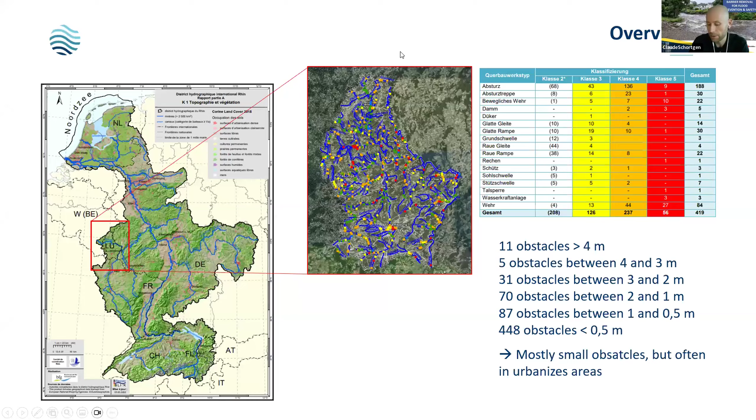So, small water bodies. As you can see in the table, and also in the image of Luxembourg, we have a lot of obstacles in rivers, which is a phenomenon that most of you are pretty sure you know from your countries. Most of them I would consider small, but small obstacles don't mean that they are easy to remove.

We have a few programs in Luxembourg that help us tackle the problem of barriers. First of all, the Water Framework Directive, which every European country needs to implement. We have 13 natural water bodies that we have declared as national nature reserves from source to mouth in our PNPN3 program. We have the Free Flowing River strategy launched at the World Fish Migration Day in 2024. And removing obstacles is a goal of the coalition agreement of the Luxembourgish government.

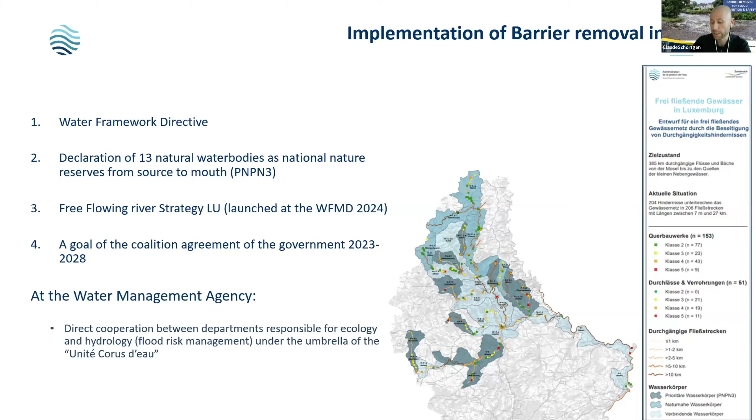At the Luxembourgish Water Management Agency, there's the Unité des Cours d'eau, the Department of Water Bodies, dealing with the problems of dams, ecological continuity, and flood risk management, which is very cool because all the ecologists, hydrologists, project managers, and construction experts work together under the umbrella of one department, which in my opinion helps a lot to tackle these problems and projects.

So I brought an example where we are planning to remove an obstacle and how we deal with flood risk. The obstacle is located on the Syre River in the east of Luxembourg. The Syre River flows into the Moselle River, which is the biggest transboundary river in Luxembourg, where we share the border with Germany. It's in fact a small obstacle, 0.6 meters high, and we did a project on this specific site in order to get rid of this obstacle. At the start of every project in Luxembourg, we do a variant analysis.

So we check different options, but one option is always the study of the removal of the dam. So if there are any specific things that don't work out, the focus of this project is, of course, the continuity and ecological enhancement of the whole river, but also flooding, technical feasibility and budget are topics when we start these projects.

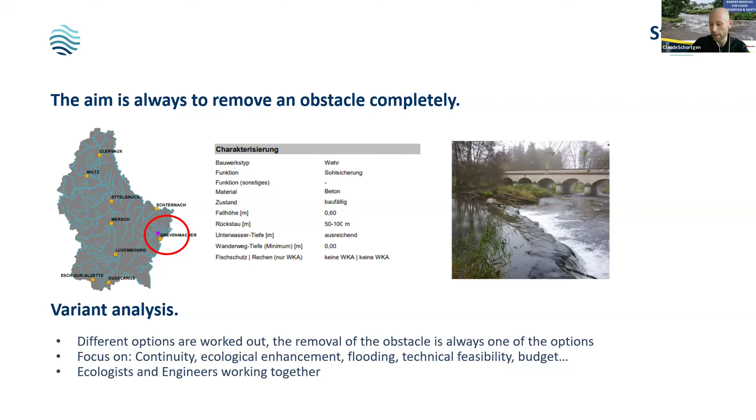Just like in our department, on a specific project, ecological experts and engineers, so hydraulic and hydrological engineers, are working together to find the best solution.

In Luxembourg, we decided that we will tackle the problems of a potential change in flood risk directly at the beginning of a project, because in our opinion it contributes to decision-making when you have different variants. It's also a very sensitive issue for potentially affected residents.

It's important to know what can be the influence of dam removal on flooding. If we have improvements on flood risks, that can easily increase the acceptance of a measure, so that is clearly a good point. And in the end of the day, we need to have these studies for the approval process.

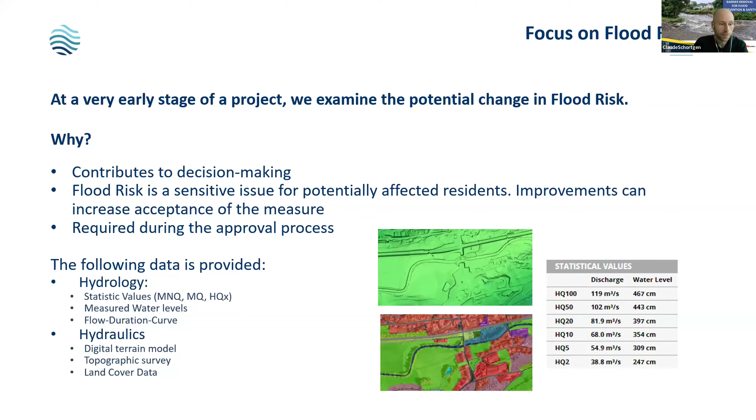To speed up the projects, we are delivering data to the people working on specific projects. So we can deliver statistical values on flood discharges, measured water levels, but we are also providing data which helps to build up a hydraulic model, for example digital terrain models, topographic surveys, or land cover data.

In this specific project, it has been decided to build up a 2D dimensional hydraulic model. This is not always the case—there are other methods that can be used to determine flood risk. Even expert judgment can be a method. It always depends on the specifics of the study area.

Well, in this case, due to the fact there were a lot of buildings potentially impacted by the project, it has been decided to make a 2D model, like I said. For this case, there have been additional topographic surveys of the dam and the bridge, which have been implemented in the hydraulic model. Afterwards, when the different variants were determined, these were also implemented into the hydraulic model.

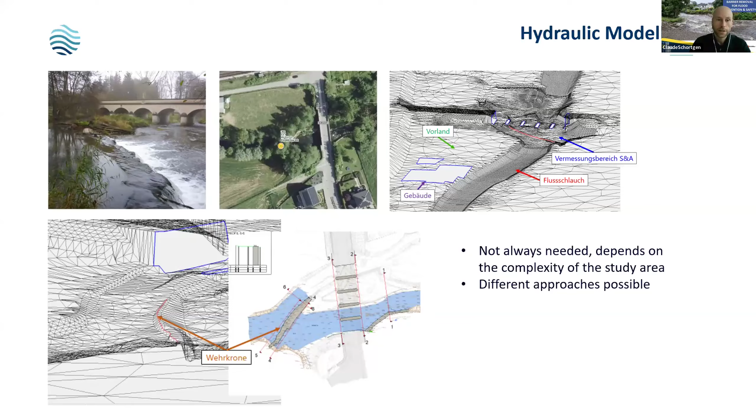We did the calculations and could review the results—the initial scenario and then the impact of the different variants. For example, we always look at the local impact, so what are the differences in water levels and in the flood zone?

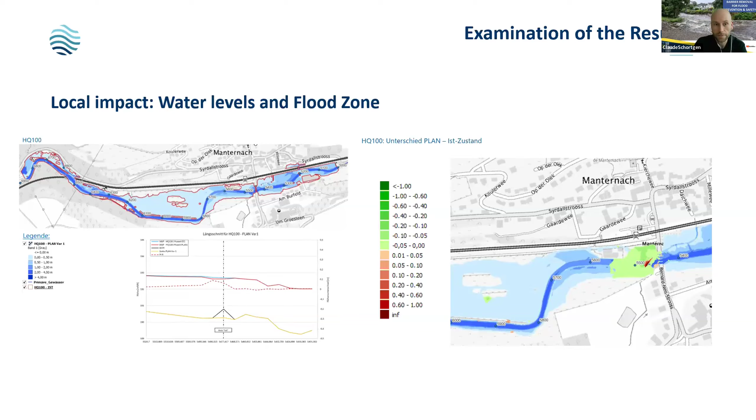As you can see here in red, the flood zone in the left image didn't change much due to the dam removal. We have a few changes in water level—mainly they are less high, which is a good thing here. You can see this in the image on the right: the green area means that we have lower water levels. These are two good things in this project.

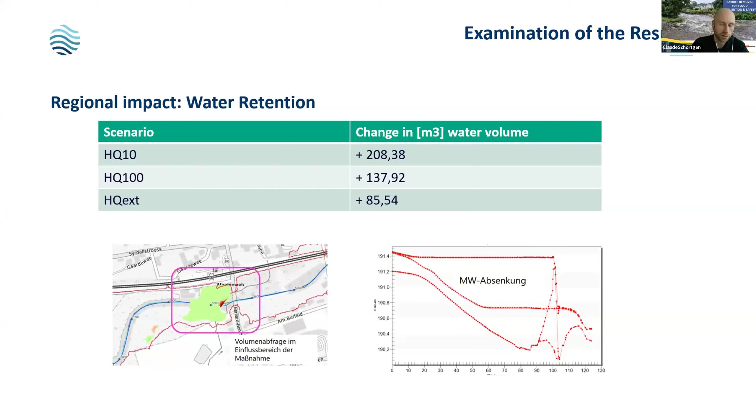Then we look at more regional impacts, looking at the water retention. We decided here to have a more simplistic analysis, so we are just looking at the water volume, which has been calculated for three flood scenarios. As you can see in the table, we have a slight gain in water volume—so there's more space for water. Even though it's not big, it's a positive effect, and that's good.

So in conclusion, hydrology and hydraulics are always studied in Luxembourg. In the case of the example I brought to you, we have no negative but slightly positive impacts. In other projects, there can be negative impacts, but that doesn't have to be a major problem—we can always look for possibilities to compensate them. If not, we have to go to other options. Optimally, of course, we want positive impacts on flood risk reduction from removal of the dam, but it always depends on the specific area where the project is located.

And in my opinion, it's always good to start flood risk studies at a very early stage of projects. So that was it for me. Thank you for your attention.

Thank you, Claude. Thank you. And I just have one very quick question, which you may or may not be able to answer: you said it was a sensitive issue for local residents.

How do you engage with local communities when proposing and communicating your plans? That depends on the project. There can be local meetings where we meet up with the people and explain the project to them. Sometimes we do much bigger information meetings where the whole city is invited and can look at the project, ask questions, and then we talk to them.

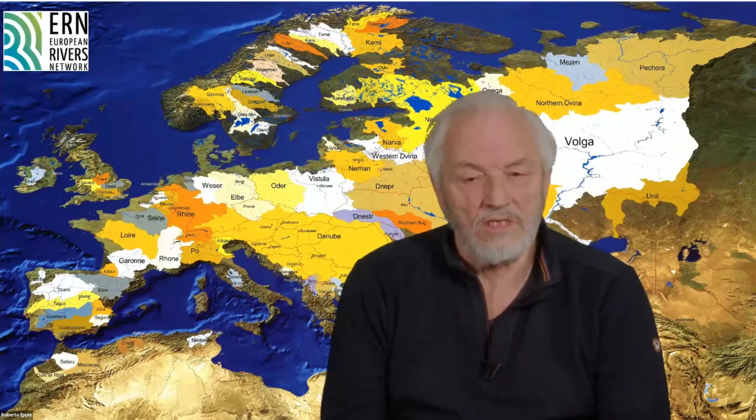First, I would like to introduce you to Dam Removal Europe and its work, and in a second part I discuss the history, with a focus on France, pioneer in dam removal.

Dam Removal Europe is a movement of river enthusiasts, volunteers, activists, river practitioners, biologists, environmental agencies, and other actors related to water management and freshwater ecosystem restoration. The whole network joins more than 5,000 individuals, but the motor of this movement is a coalition formed by 7 organizations united by one common goal: restoring free-flowing rivers. Currently, Dam Removal Europe is composed of WWF, the Rivers Trust, the Nature Conservancy, European Rivers Network, Rewilding Europe, and Wetlands International. DRE started in 2016 with the slogan, 'The freedom of rivers begins when barriers end.'

What do we do? We take a global approach: think globally and act local. We believe that by connecting the right people and working together, we can restore rivers faster and bring them to life again. Our action model is divided into several activities: identifying change makers in different countries, sharing solutions, generating awareness for the need to remove barriers, tracking down existing and removed river barriers, connecting practitioners and river enthusiasts around Europe, and helping organizations find funding for their dam removal projects.

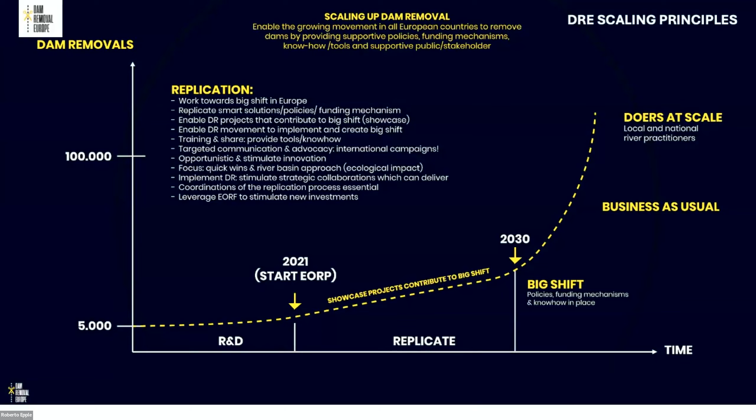The good news for the future is there is no way to achieve this goal without dam removal.

However, in order to understand how and why European public policy has developed in favor of river restoration through the creation of ecological continuity, we need to extend the time frame. It's always good to look back at the past to understand where we stand and what new paths to take—above all, which ones not to take.

This is not new, I agree, but it is still true. So, what is the background? Was there dam removal before DRE?

Yes, it started in the 80s and 90s, around the same time as developments in the USA. The following phases can be distinguished. From 1980 to 1995, most of Europe's rivers were in agony—straightened, dammed, polluted and overused. One of the most visible consequences was that salmon and other migratory indicator species either died out completely, for example in the Rhine and Elbe river basins, or were severely threatened.

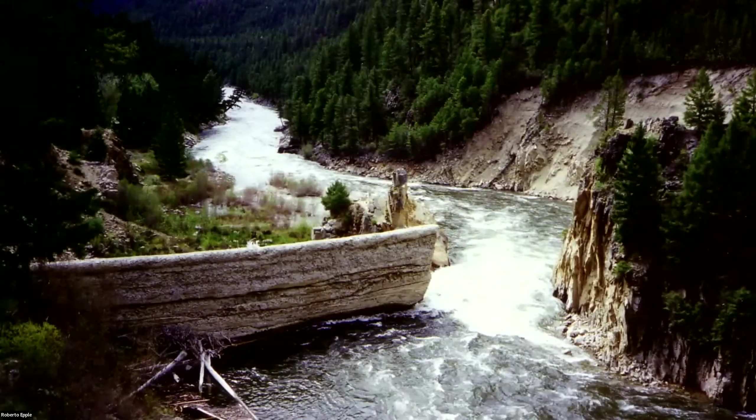I remember meeting with North American NGOs in Idaho. During a private excursion, I happened to come across a strange dam on a salmon river—only half of it was still standing. Local people explained that this disused dam had been spontaneously dismantled, without any authorization, by the local Native American population.

Back in Europe, we included dam removal in our Loire Vivante campaign. But dam removal was still absolutely unthinkable in Europe. That is why we first had to unblock thousands of people's minds before dam removal became an option. After a 10-year campaign, the vision became a reality.

From 1996 to 2000, the first ever removal of 3 major dams took place in France, parallel to removals in the US. Main reasons: continuity for migrating fish and outdated dams in poor technical condition.

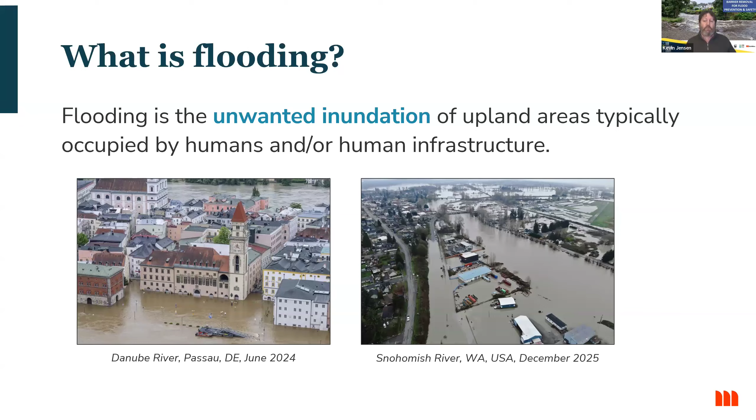Instead, here we understand flooding to mean that type of inundation that impacts the built environment or impacts public safety or both. And it's this type of flooding that we seek to reduce through barrier removal. But what do we mean by barrier removal? What's a barrier? A barrier is a longitudinal or lateral feature within a river corridor that alters or stops the flow of water. Longitudinal barriers, or sometimes transverse barriers, are barriers that obstruct the flow of water longitudinally or in the downstream direction. Examples include dams, weirs, and waterfalls.

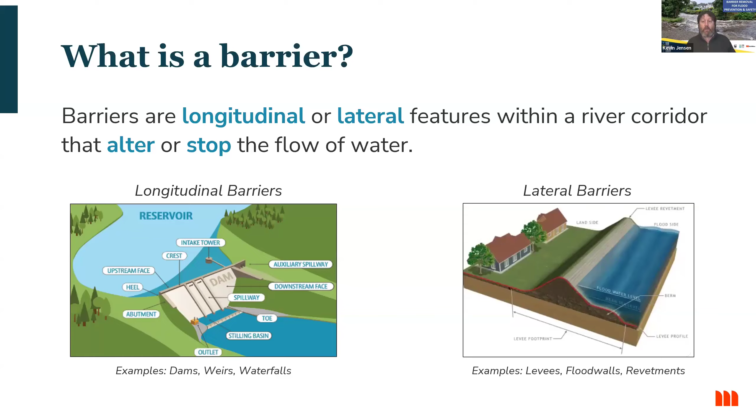These barriers don't usually prevent water from passing downstream, but they do alter the flow of water as it continues on its path. Lateral barriers are those that obstruct the flow of water laterally or over the banks of a river and into the floodplain. Examples of these barriers include levees, flood walls, and revetments. These are structures that usually keep water out entirely.

Okay, so based on these definitions, you might be wondering if certain barriers actually prevent flooding. And I think the answer to that question is yes, some barriers do prevent flooding. For instance, there are dams that have been constructed primarily for flood control. So here's an example on the left from the Los Angeles River in Southern California, where Sepulveda Dam was constructed to detain water and attenuate flood peaks upstream of a highly urbanized environment. And on the right, we have another example from my region in the Pacific Northwest, where Mud Mountain Dam is operated as a flood control facility.

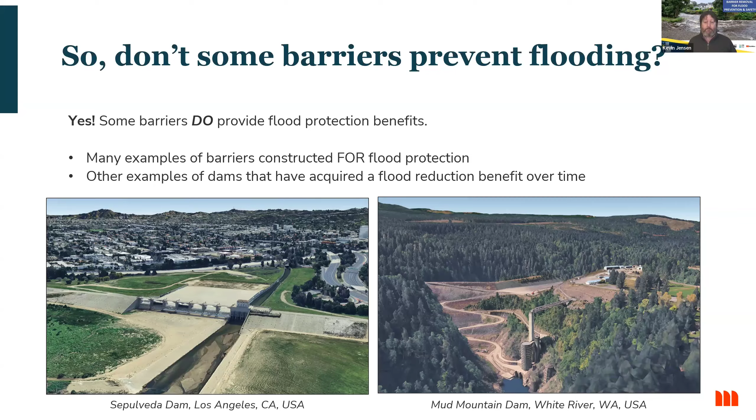These are examples of longitudinal barriers that provide flood protection, but there are also many, many lateral barriers that continue to provide flood protection in developed areas through the use of levees and flood walls. I mention these examples because I want to be clear that some barriers provide flood protection, and their removal may exacerbate flooding risk in the absence of additional infrastructure modifications. So as we continue this talk, please remember that barrier removal should be preceded by a thorough consideration of the existing benefits of each barrier, should there be any.

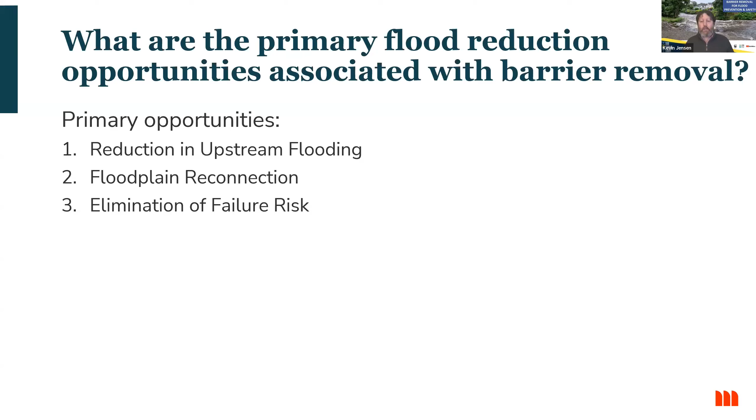Okay, enough preamble. So what are the primary flood reduction opportunities associated with barrier removal? Well, there are really three primary flood reduction opportunities associated with barrier removal, namely reduction in upstream flooding, floodplain reconnection, and elimination of failure risk. I'd like to talk briefly about the mechanisms of each of these, along with some examples, important considerations, and potential benefits. And we'll start with reduction in upstream flooding.

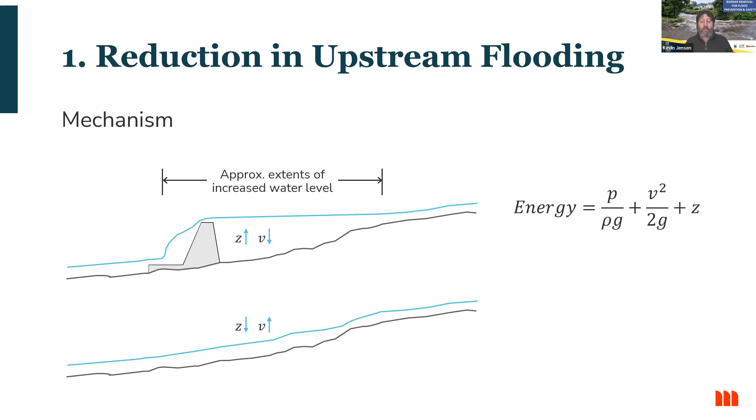So when longitudinal barriers like dams are installed, they impound water behind them, kind of like this figure. For the fluid mechanics people out there, this results in a decrease in the velocity head and a corresponding increase in the elevation head behind the barrier. That leads to an area upstream of the barrier that experiences higher water levels, all else being equal. So when we take a barrier out, the opposite occurs, right? Water starts flowing freely again, and the elevation head drops down, and the average velocity goes up. And it's this reduction in elevation head upstream of the removed barrier that can lead to reductions in upstream flooding.

This is an example from León, Spain, where the San Marcos weir once stood. In the photo at left, we can see the effect of the inundated weir, which creates a hydraulic jump in the flow field. By the way, that hydraulic jump creates a velocity barrier for most aquatic organisms, but that's a topic for a different discussion.

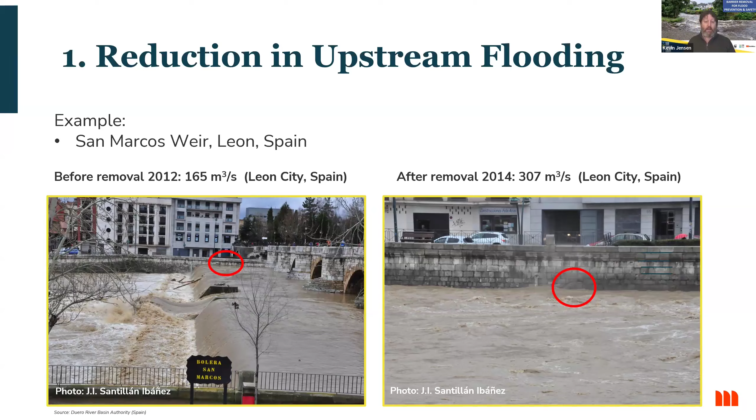In the photo on the right, after the weir was removed, we not only see the disappearance of the hydraulic jump, we also see a significant lowering of the water level. And that's at a flow rate that's roughly twice the flow rate shown in the photo at left.

Of course, there are important effects of barrier removal that must be considered in the areas upstream. That includes bank stability. So when water levels are lowered, the bank loses the hydrostatic support of the water column. And in addition, pore water pressures remain high. That can lead to localized bank collapse that can impact property owners.

Another consideration is channel degradation. In cases where weirs have been in place for a long time, the channel upstream has likely experienced some level of sediment deposition and channel aggradation. And when a barrier is removed, this area is often oversteepened, and to equilibrate will lead to the mobilization of that impounded material and the associated degradation or incision of the channel. It's not necessarily a bad thing per se, but it can have downstream water quality impacts.

And lastly, vegetation impacts upstream of barriers need to be considered prior to removal. In many cases where the water level's lowered after barrier removal, the associated groundwater level upstream gradually lowers as well. This can make it more difficult for riparian vegetation to access water.

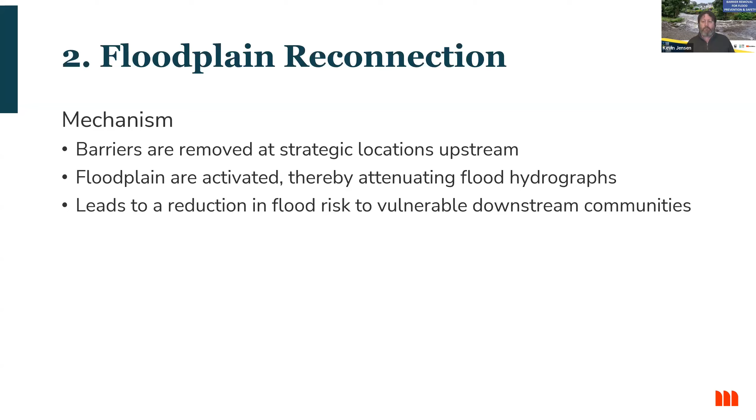In terms of storage, as the floodplain's inundated, the water spreads out and slows down. This has the effect of lowering the peak of the hydrograph, effectively lowering the peak of the storm. And in terms of loss, floodplain reconnection may lead to stormwater infiltration into the ground, which further reduces the peak of the hydrograph.

A great example of this type of flood protection effort is taken from Johnson Creek, which is a tributary to the Willamette River in Western Oregon in the US. Here, formerly developed rural land was acquired, and the banks of the river were reconfigured to reconnect high flows to a restored floodplain of about 1/4 of a square kilometer in area. That's the little green area shown in the figure on the bottom left that's called out as the East Lents Reach. You'll notice that further downstream, so to the left in the figure, is the town of Milwaukie, Oregon, which has about 20,000 people living there.

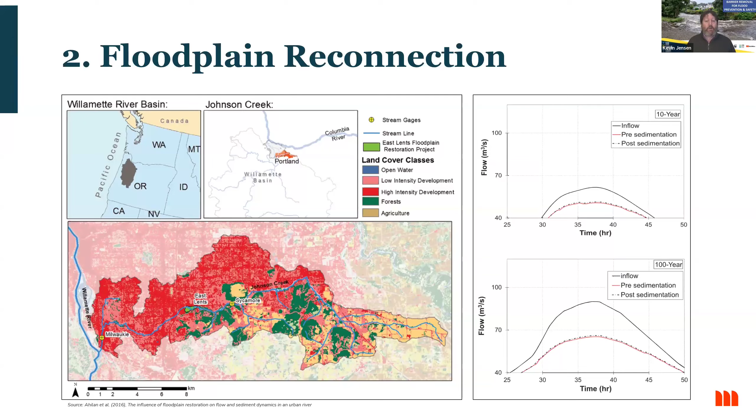Of course, for this type of flood reduction to really work, specific conditions need to be met so that we're not doing more harm than good. Specifically, the barrier should probably not be an active flood protection barrier, such as a levee located within an urban corridor. There are plenty of instances of existing levees that are defunct and that no longer protect areas from inundation. These may be good candidates for removal and may lead to downstream flood protection.

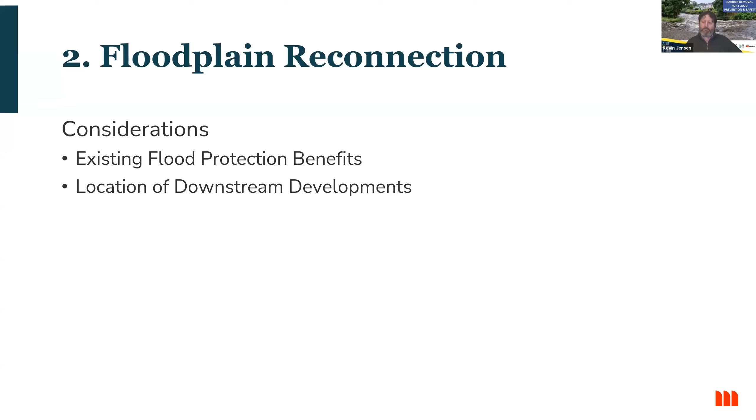Another consideration is the proximity of the inundated floodplain to the downstream communities or infrastructure. So if the location where we need protection is too far downstream, the impact of the floodplain reconnection may approach insignificance as a larger and larger watershed contributes water to the river.

Okay, the third and final type of flood protection through barrier removal is due to the elimination of failure risk. So in all of the cases I discussed before, flooding is a probabilistic phenomenon. Therefore, flood protection can be understood really as a reduction in flood risk. Here, however, we have the complete elimination of a risk, specifically the flooding risk associated with an uncontrolled release of water impounded behind a longitudinal or lateral barrier. Without the barrier, there's nothing to fail.

These figures provide a little more context about this risk. So in the United States, about 65% of historical failure events have occurred at dams that are 65 years old or younger. Meanwhile, about 76% of all dams larger than 50 feet tall, so about 15 meters, are 65 years old or younger. The point here being that the likelihood of failure events into the future seems credible, as does the flooding that may accompany those failures.

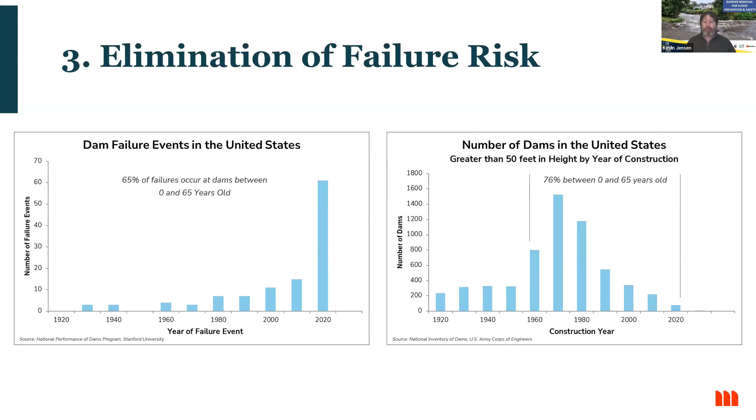Mechanisms of failure events include piping failures in earthen embankments through seepage pathways, overtopping failures during floods, or load rejections at hydropower plants, or seiches following landslides, and structural failures during extreme loading conditions such as earthquakes.

Okay, last slide. I know it's not the sexiest, but it's important. One of the main considerations when it comes to the elimination of failure risk through barrier removal is related to the existing beneficial uses of the barrier. In the case of lateral barriers, when they fail, they can have devastating consequences. However, they may also protect communities and infrastructure during much more frequent storms. So managers need to weigh the benefits and relative risks associated with keeping or removing those particular barriers.

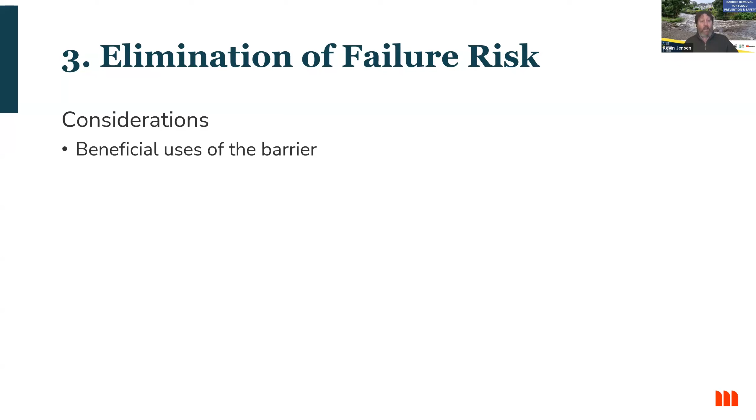And in the case of dams that could cause significant flooding were they to fail, they too may very well provide societal benefits, including flood protection, water storage, hydropower, and more, such that once again, a holistic approach and thorough weighing of the pros and cons of removal should be conducted.

And that's what I've got. Back to you, Ella. Kevin, that was great. Thank you so much. Really interesting and helpful. A few questions here have just come in.

How do you deal with the eroded downstream stretch of river after barrier removal? So that's a complex question to answer. In many cases, with barrier removal, the material impounded behind the barrier will make its way downstream and actually aggrade the channel or build it back up. So there could be localized incision, but on a broad scale, actually dam removal will reestablish that natural sediment transport regime and could help build up an incised channel.

Okay, and finally, this is a question that came in: when we talk about open rivers and dam removal, the person asks, I would like to ask if my understanding that we are talking about removal in ecologically important rivers and dams is correct? What are your thoughts with regard to, say, hydroelectric projects?

Right. So again, the focus of this discussion was primarily on flood protection. But let it be known there are absolutely other advantages to the removal of dams and levees, which include ecosystem restoration, aquatic habitat health, reconnection, and so forth. It gets kind of complicated once again when we talk about societal benefits related to hydropower. And again, managers need to weigh the pros and cons of the benefits through ecosystem services and flood protection, for example, with power production. Not the most straightforward answer, but that's what we got.

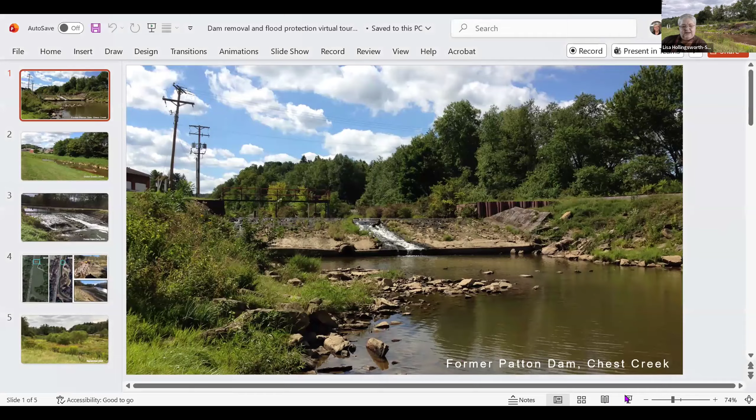And it had been a public water supply, and that use was retired in 2015. So the dam no longer had a purpose. Let's see, need to go to this. Thank you. Come on. There we go.

All right. So moving along, this dam was located actually at the head of a levee. So that was kind of interesting, the situation here. And you'll see this levee actually has some

random boulder placement, and it's actually habitat for trout, which is a salmonid species here in the United States. And that was done purposefully just to prove a point that you could add habitat into an area that was leveed and it didn't cause any kind of a problem or a rise that would cause a problem with flooding.

We actually did not touch the leveed section at all. We just looked at the dam. And behind the dam, of course, we have elevated water, raised the water level about 4 meters. And behind it, we had a wetland that had been drowned and a floodplain that had been disconnected.

So as you can see, the dam was deteriorating. This is what it looked like in 2019. The community was just not convinced that they needed to get rid of this dam. It had been their public water supply since the 1950s. People had an idea that maybe they might put it back in service.

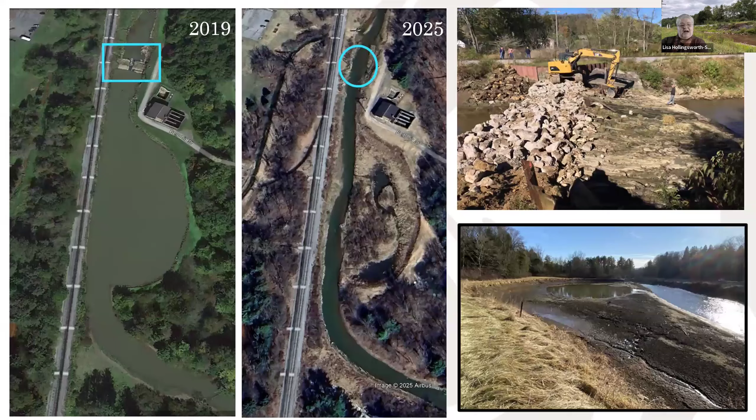And after that flood, the community said, okay, we believe you. Let's get rid of this dam. We realize that the flooding is related to the dam itself.

And so here's a comparison, both overhead views, aerial views, and then a picture on the right of dam removal construction, and also the wetland area that was behind the dam that had been inundated. So you can see the changes here. We exposed this wetland. We have lateral connectivity now at this site, and the site was chosen specifically for that opportunity.

So one of the questions that Herman asked me when we talked about this project was, how could we make sure - how could we prove that this actually worked. And okay, so I'm done with my slides. Let me back up here.

And the answer to that is that, first of all, we've had 7 storms since that flood in 2018 that have equaled or exceeded the flood flow. And there have been - the stream has not gotten out of its channels. It has not flooded the area that it flooded before.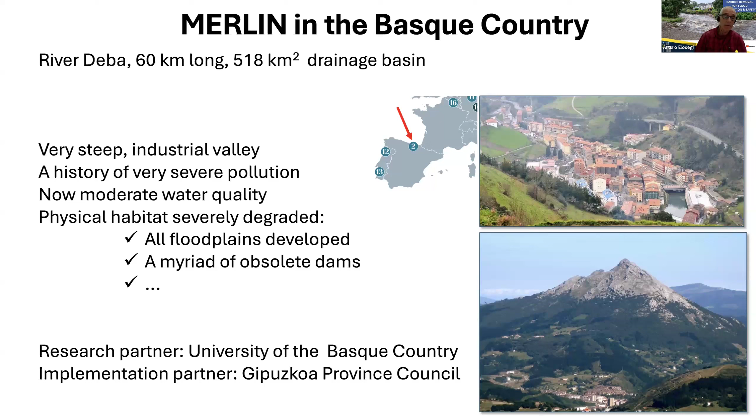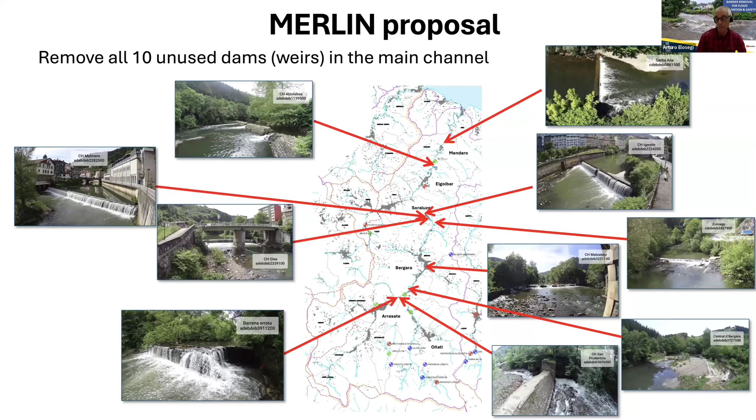So there we are working as a research partner, the University of the Basque Country, and as what we call an implementation partner, the Gipuzkoa Province Council. Our plan was to remove all unused dams in the main channel of the river Deba, that means 10 dams. They are not real dams, they are weirs, they have no capacity to regulate the flow, just elevate the water level. There are some still active ones used for hydropower and other uses, but these 10 were long unused, so we wanted to remove all of them.

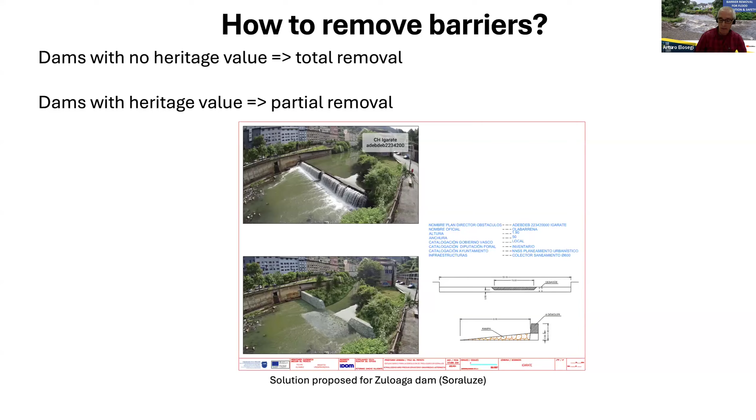And how do you plan to do that? Well, that depends. Some of the dams have no heritage value at all, so we planned total removal, whereas in dams with heritage value, our plan was partial removal, like in this proposal here. You can see in the top picture the current dam, and there we wanted to open a trench in the middle tier of the dam.

Dams and flooding - Kevin has explained it much better than I could, but contrary to common belief, dams, especially urban ones and small dams, increase flooding risk. Only large dams, which have large storage capacity, reduce it. In the Basque Country, we have many flood risk maps, and many exercises modeling what would happen if we remove dams, if we change bridges, and so on. In general, we see that especially in urban sections, we can improve the situation a lot for low and moderate floods. For the big flood, the one that happens once every century, this is not the solution.

We are here in the province of Gipuzkoa, which is one of the provinces in Spain where the economic damage of these floods is larger. So what did we do? First, we met all councils, most city mayors. We contacted all stakeholders in the valley: hydropower, the water sectors, agriculture, industry, even people who are working to protect the dams.

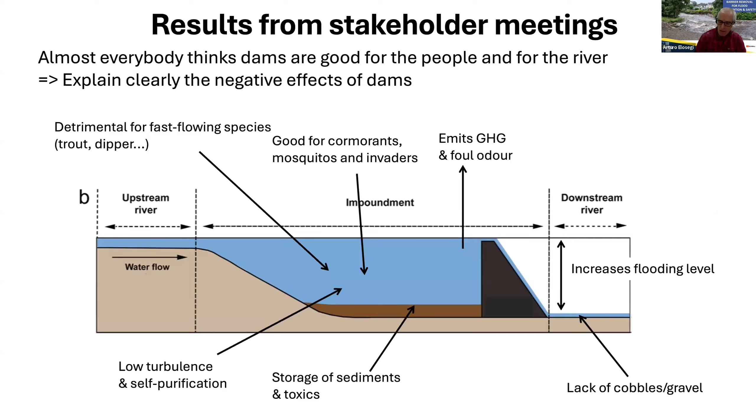In these stakeholder meetings, we realized that almost everyone thought dams are good for the people and for the river. So we had to clearly explain the negative effects of dams, as Kevin did, using this figure showing the extent of impacts of dams: they increase flooding level, more invaders, more mosquitoes, toxic sediments, and so on. Eventually we managed to convince most people that the dams near their houses were detrimental for them.

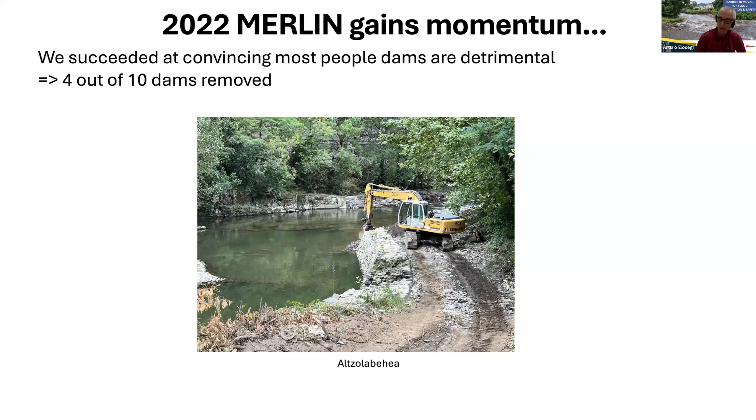In 2022, the first year of Merlin, we succeeded at removing 4 out of the 10 dams. So everything seemed okay, we were going at a very good pace, but then we hit a double barrier: first a legal barrier linked to culture, and second a psychological barrier.

The legal barrier: many of these dams were declared of heritage value by city councils, associated with ancient mills or factories. The idea was that even if they are of heritage value, we could still open them or build a trench. But the Department of Culture of the Basque government declared these dams of top value and forbade any action on them, intending to protect them like the best cathedral in Spain or the Grotto of Altamira.

When we complained that these dams create a flood hazard, they said we should seek alternative measures such as dredging, cleaning vegetation, building fish ladders, and that we must protect not only the dam but also the riverscape. We met with the Basque government and realized they were upset with us environmentalists who they felt despise heritage — they felt outraged by this dam removal movement in Europe.

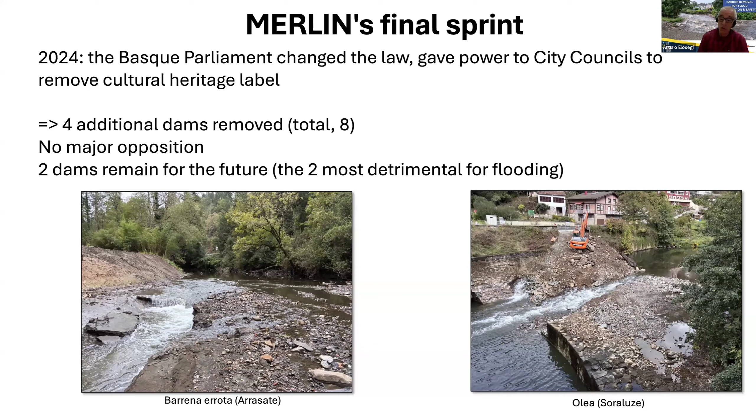Surprisingly to me, there was no major opposition. I expected demonstrations and nothing happened. 2 dams remain for the future. The project is ending next month, but I hope they will be removed soon.

To finish, the University of the Basque Country started last year to assess the social impact of its research projects, and they selected Merlin as a pilot project. So we had a meeting in which they asked me, what is your balance? I thought it was important for society and so on.

Then Arantxa Zurunzaga, the engineer at the Province Council, thought Merlin changed their approach to river restoration, that they learned the importance of including the local population in decision making. So she was more positive than me.

Then the mayor of Soraluze said Merlin was extremely important, that it forced the town to rethink its relationship with the river. The process is still going on, but the outcome will be a more sustainable town. So the most positive among all of us was the mayor, who had to live with people protesting every day at the door of his office.

So did we learn anything? First, we learned that there are still many wrong perceptions of the benefits and risks of dams, so outreach is necessary. We also learned that some people will not accept any evidence - even very clever and well-educated people. You cannot convince flat Earth believers.

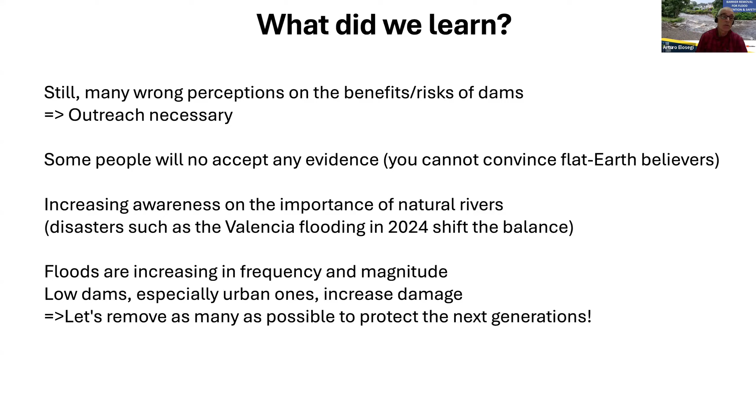We know floods are increasing in frequency and magnitude, and that these low dams or weirs, especially urban ones, increase the damage. So let's remove as many as possible to protect the next generation. Thank you.

It depends on the person. For some, the ecological benefits of restoring fish habitat were most important. For others, it was the reduction of flooding risk. For some, the reduction in mosquito populations. So you need a battery of arguments, and you have to learn how to use them at the right moment with the right person.

We have a question here. What do you do with stored sludge and toxins in the reservoirs? How do you make sure it doesn't pollute the downstream river after dam removal? Is the sludge typically pumped out before dam removal projects?

This river was in the past extremely polluted. Now, whenever they analyze the sediments, they are not so bad, and our rivers are very flashy, so when you remove the dam, the sediments are carried away to the sea or farther. So far we have not seen any impact of these sediments. The province council has already removed about 130 dams, out of over 1,000 they had in the province, and we have not seen any impact of these sediments.

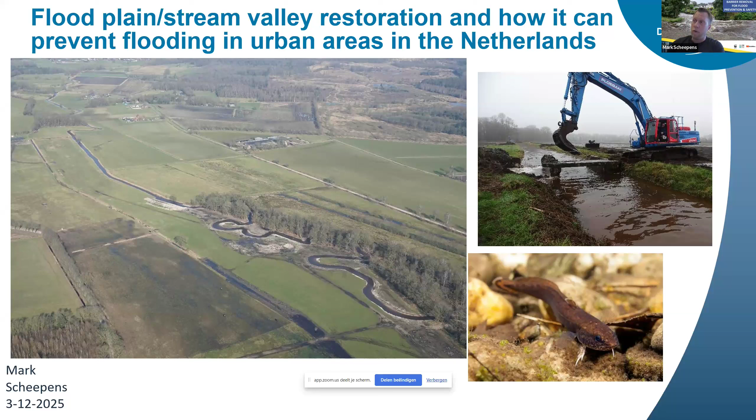The Water Authority is responsible for managing and improving the water quality and quantity in the streams and rivers located in the central part of the province of North Brabant in the south of the Netherlands. We are responsible for wastewater treatment and for the management and maintenance of the streams.

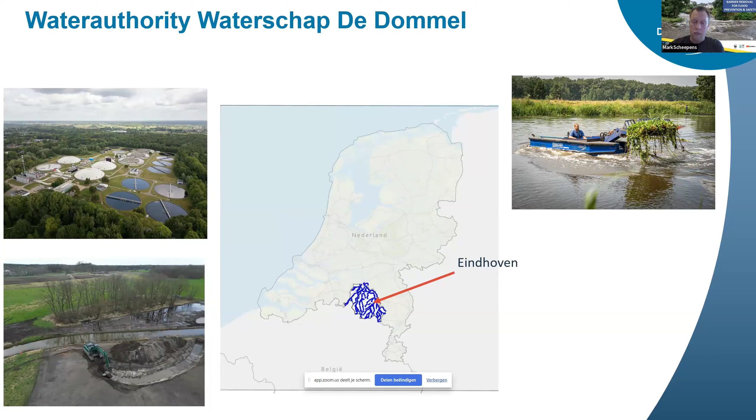We are also responsible to take measures to improve the chemical and ecological status of our streams. This stems from the responsibility we have to achieve a good ecological status of our streams in accordance with the Water Framework Directive. Central located in our catchment area is the city of Eindhoven, and this area is especially known for its high-tech industries, and the company ASML is the largest employer in our catchment.

Now, something about the history. The streams were formed after the last ice age approximately 20,000 years ago. The melting ice eroded the valleys and streams, creating streams on a primarily sandy subsoil.

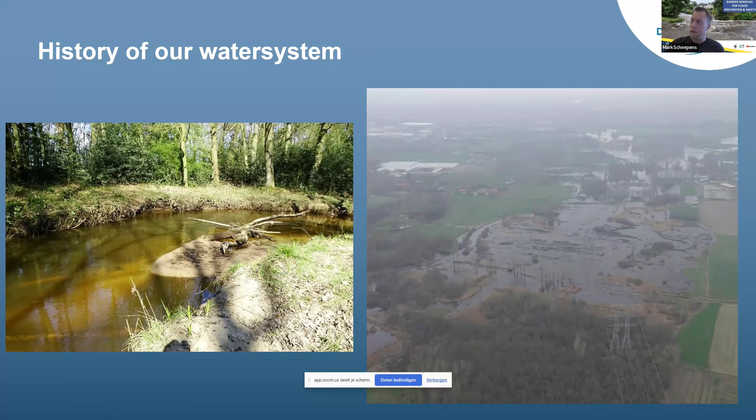The streams are naturally fed by rain and groundwater. Very deep and old groundwater seeps upwards in the catchment area, primarily in the stream valleys. In the southern part of the river basin, the level landscape is approximately 35 meters above sea level, and in the north, where the Dommel flows into the Meuse, the landscape level is approximately 3 meters above sea level. We call our streams lowland streams on sandy soil.

Now, the Dommel Authority was founded in 1863. Our only goal back then was to drain the water as quickly as possible for agricultural purposes and improve the situation for urbanization. This means that streams were canalized and many weirs were built to artificially manage the water level.

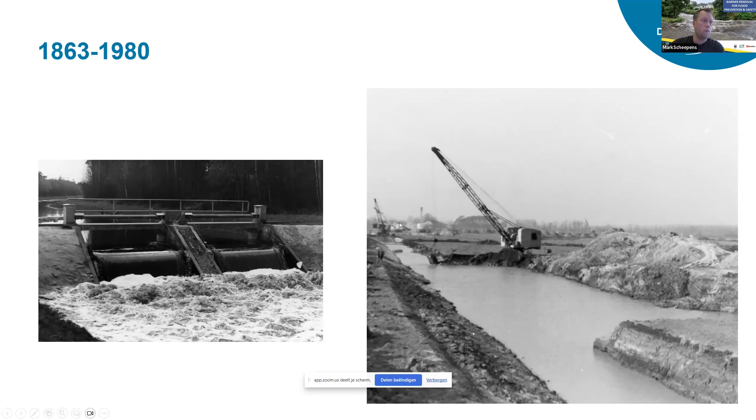We have installed approximately 170 weirs that restrict fish migration and the achievement of a good ecological status. Most weirs have a drop between 0.5 and 1.5 meters. The weirs are not big dams, but big enough to prevent fish from migrating. More importantly, they restrict free flow, preventing processes like sedimentation and erosion. As a result, a lot of silt remains in the water system.

These measures had a major negative impact on the ecology of the streams and stream valleys. Also importantly, groundwater levels have dropped dramatically, and the wet river valleys with their natural rich vegetation and biodiversity have largely disappeared.

We are not going to achieve the goal to be ready before 2027, but we have already come a long way. From 1989 till now we have solved 104 bottlenecks, and we have about 60 weirs where we have yet to solve the fish migration bottleneck. From the 104 fish migration solutions, there are 56 free flow solutions and 48 technical solutions.

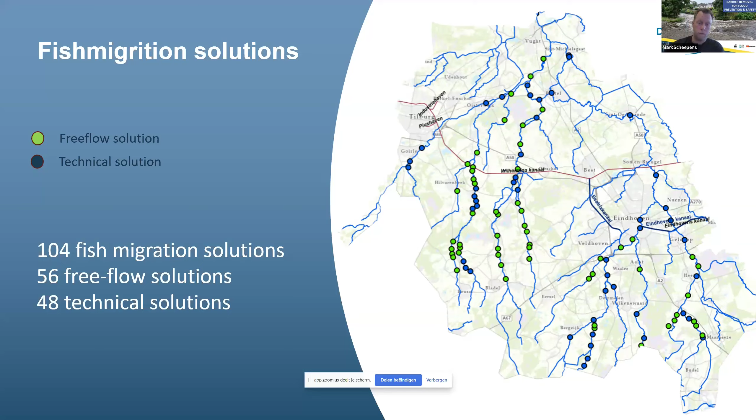When we are working on a solution, the first thing we look at is if we can remove the weir. If that's not possible, then we look for a technical solution. If we would only install technical solutions, then we would not improve the ecological status of our water system.

The challenge with removing weirs is that we must combine this with stream and valley restoration. We achieve this by removing weirs from streams in conjunction with stream and valley restoration. When the weirs were built, the streams were also canalized, so we cannot remove the weirs if we do not also let them meander again. On the right of the screen is a photo of an example of one of our latest remeandering projects. In this project, we have removed 3 weirs.

Now, why don't we always go for a technical solution or go for a free flow solution? Especially in urban areas where there's no room to remeander the streams, we therefore cannot remove a weir.

In this picture on the left, a weir in the Dommel in an urban area. We have made a vertical slot fish passage and a canoe gutter on the left side of the picture. In urban areas, there's no room to remeander.

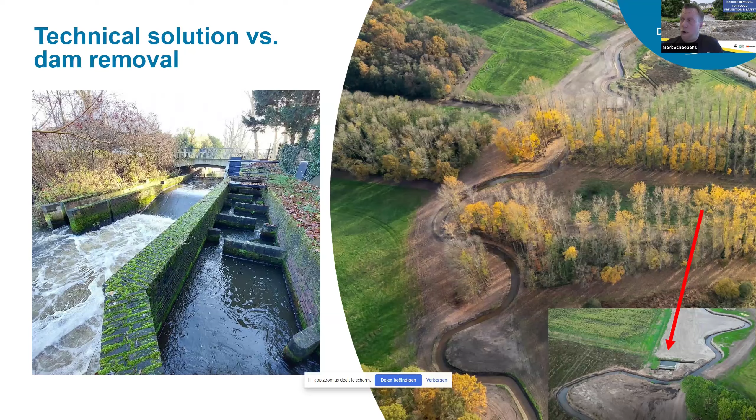In some cases, the weir is not a weir but an old watermill, and those in the area of Eindhoven are all protected monuments, and 3 of them are painted by Vincent van Gogh, which makes them a part of our culture.

The Water Authority was initially established solely to ensure drought conditions. However, with climate change, we are now seeing prolonged droughts combined with increased rainfalls in short periods of time, forcing us to change. Add to this the enormous population growth, and the drinking water supply in our catchment is entirely dependent on groundwater. Farmers also extract significant groundwater for crop irrigation.

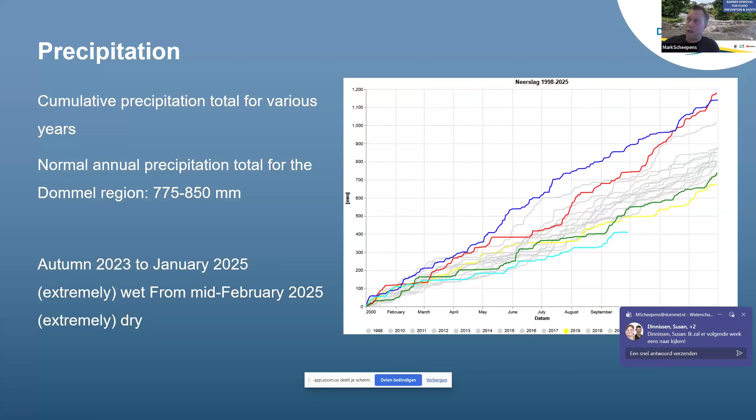This causes groundwater levels to decrease, which has a direct impact on the water flow of streams and valleys. The water system is out of balance despite the fact that the Netherlands has a precipitation surplus. The summer of 2018 saw one of the driest years. Due to the drought, there was a lot of drying out and therefore a lot of fish mortality in our streams. The winters of 23 and 24 were years with extremely high rainfall. The rainfall caused a lot of flooding, mainly in rural areas.

Especially after the dry summers of 2018 and 2019, we realized that things need to change and that water should be a guiding principle. As a catalyst for this dry period, we, Waterschap de Dommel, have developed a new vision, the water transition, what water wants. It divides the area into three parts: the high peaks, the flanks, and the stream valleys. In the stream valleys, we have set goals: sufficient space to absorb rainfall peaks, a stream valley that does not have a drying effect on the environment. That means water gets more space, streams keep flowing, and the valley is becoming wetter.

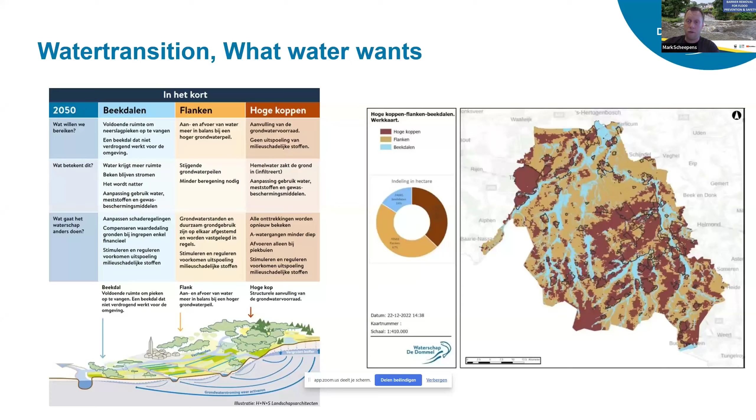Now, what will the Water Authority do differently to achieve these goals? We have subsidies for blue services where farmers can get compensation for loss of income due to water targets such as water storage, the discontinuation of crop protection products, and measures to increase ground and surface water levels. When we have taken the measure stream valley restoration, we then sell the land with the restriction that it must be managed as nature and that no more fertilizers or pesticides may be applied to the land.

For the Run stream, I have worked out how we have applied the water transition in practice here. The Run is a lowland stream upstream of the city of Eindhoven. The stream has also been canalized in the past, and numerous weirs have been installed. As a result, the ecological quality is poor according to the Water Framework Directive. To improve the water quality, we began removing 2 weirs in 2021. Instead, we re-meandered the stream and created a floodplain.

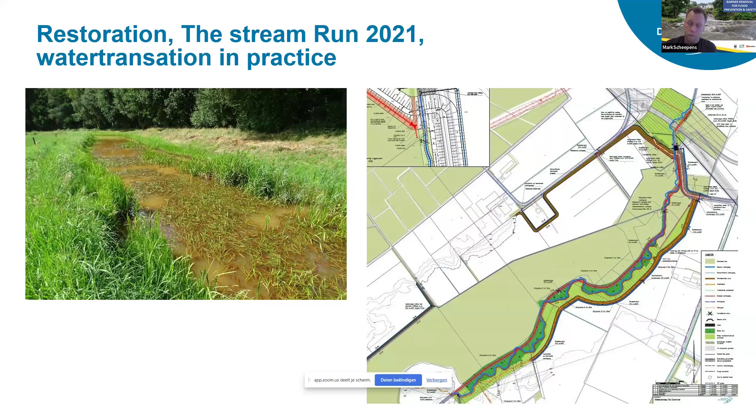The stream's immediate riparian areas have been removed from agricultural production. Measures have been taken to wet the stream valley by filling in ditches and making the meandering stream very shallow, so it no longer captures as much groundwater. With these measures, we have an increase in flooding, which we have taken very deliberately. We bought the agricultural land along the stream to develop it for our water purposes. The picture on the left is the canalized stream.

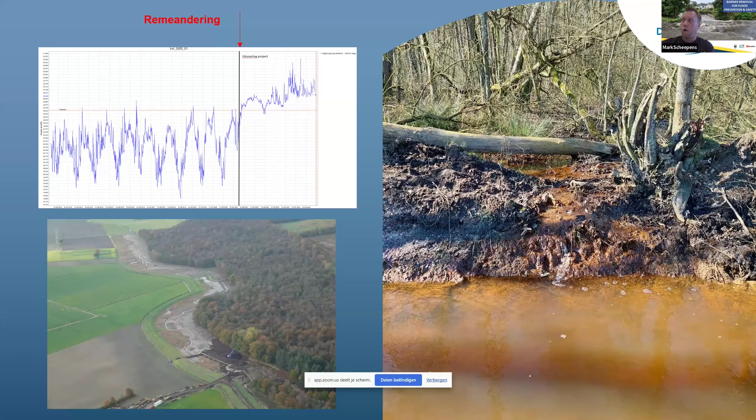Due to the measures taken, groundwater levels have risen significantly, and the water is now above ground level. In the graphic, you see the groundwater levels before and after the project. The photo under the graphic is taken during the execution of the work. In the photo on the right, you see that groundwater no longer seeps directly into the stream, but flows across the ground to the stream.

Now, in the background of the photo on the right, you see white buildings. Those are ASML buildings where they manufacture their famous chip machines. And behind them lies the city of Eindhoven. If there's extreme rainfall, built-up areas in Eindhoven can flood. These are situations that occur once every 100 years from our calculations. If that threatens, we can store an additional 460,000 cubic meters of water in this area to prevent flooding in Eindhoven's urban and industrial areas.

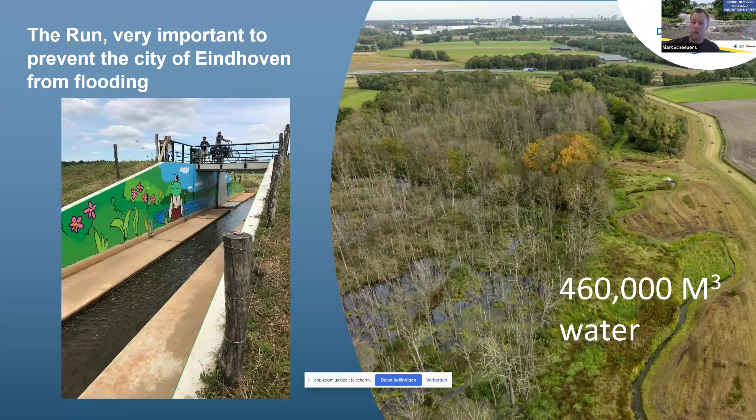We built this weir and dike on the left. The weir is always inactive, so it doesn't restrict free flow or fish migration. If the city of Eindhoven is in danger of flooding, we will raise the weir and the Run catchment area will automatically fill with water. Here are some results of the project.

Now, what challenges do we face? We have subsidies for blue services where farmers can get compensation for loss of income due to water targets, such as water storage and the discontinuation of crop protection products. It is still entirely voluntary to participate in this, and the compensation does not always outweigh the profits from current crops such as beet, corn, and potatoes.

Those vegetations do not go well with wet stream valleys, so there is some resistance among farmers to raising water and groundwater levels. In the Netherlands, we've always tried to control water. Now we need to make water the guiding principle, something that's not yet in our DNA. Current generations often prefer a water system that is manageable and controllable.

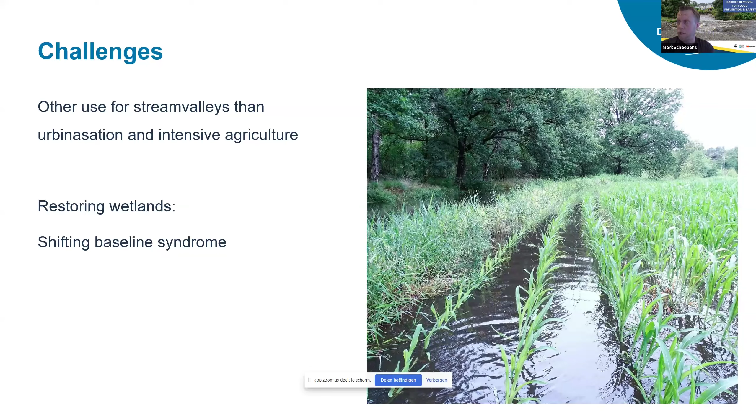This is also where the shifting baseline syndrome comes in. Entire generations, including myself, are no longer accustomed to wet stream valleys. Because we Dutch people have such a long history of fighting against water, we often see the danger of water more than the benefits it brings us. It would be wonderful if the new generations were given a different baseline, where they are once again accustomed to stream valleys being wet, highly biodiverse, and also protecting urban areas against flooding.

And the good news is that we have some farmers who see opportunities to farm biologically and use the wet stream valleys to their advantage. A biological farm has bought 30 hectares of wet stream valleys to use the vegetation in their deep litter cowshed. This was also a project where we removed two weirs and created a wet stream valley and flowing stream.

After the project was done, we sold the land to this farmer for a reduced price because the land has restrictions in the use of fertilizers and crop protection, and because wet stream valleys do not have such a high yield and mowing entails higher costs.

So the answer to the question, can dam removal prevent flooding? Yes, it can in places where we absolutely don't want floods. In a big part of our stream valleys, we should raise the water level, and that means that it will increase flooding, which is important for our biodiversity and to restore the water balance. And in most cases, it will reduce the risk of flooding in urban areas.

That's my presentation. Back to you, Ella. Mark, thank you. Thank you so much. We see the dangers of water rather than the benefits it brings us. I think that's very, very true. Thank you so much, Mark.